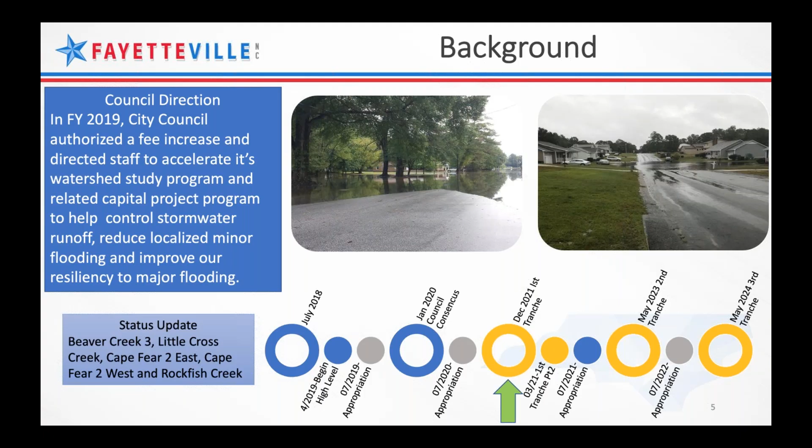First of all, like I said, it takes a lot of hands and minds, great minds, working on this kind of program. We've got tons of consultants involved, and everybody's just been phenomenal. It's been a great experience. Like I said, Freese and Nichols serves as our external program manager overall, and then we have different firms managing certain watersheds and modeling watersheds, and also surveyors.

But it doesn't stop there. As y'all might imagine, not only do we have interdepartmental collaboration going on with our stormwater folks, engineering, construction, streets, we also have collaboration across departments citywide with economic community development, parks and rec, emergency management.

And then we also have intergovernmental collaborations: emergency management, USGS, the Corps. I should have added DOT as well, and then PWC, the Public Works Commission, which you'd be surprised how we work with them. I'm just learning that. We do stormwater and public services; they have streets and traffic, water and utilities, and sewer.

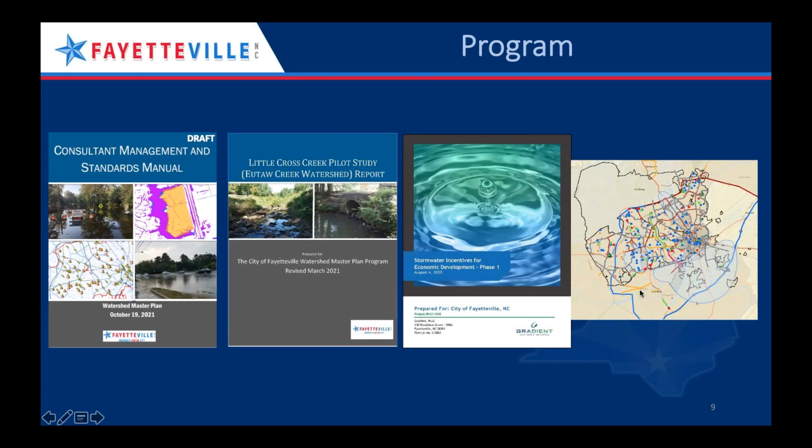So for the study itself, at a glance, the City of Fayetteville, the watersheds that are in the City of Fayetteville, and we have 15 watersheds. Like I said, we just realized there was no way we could take a whole watershed and study the entire thing citywide, so we wanted to spread out our studies.

So the yellow that you see is what surfaced after conducting the ICM, the rain on mesh modeling, and then the watershed prioritization that followed. We took the subbasins and evaluated things like disconnected structures, flooded roads, emergency facilities, and impacted structures, along with a few other criteria. We did a ranking and scoring, and then had a cutoff because we only had so much money. So the yellow subbasins are the ones we identified and presented to council for their approval to begin our studies.

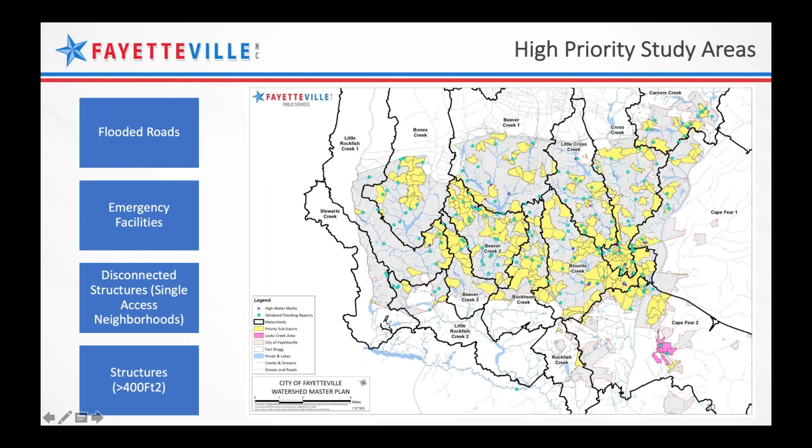So when we presented this to council on Monday, we pulled in these definitions, and I'm not sure I know this group, so I'll just briefly say that everybody kind of understands a watershed. I wouldn't say it quite like this, but we're using computer software to simulate rainfall runoff for the various storm events to predict how much flooding we've got and to predict how well our system performs during these design storms.

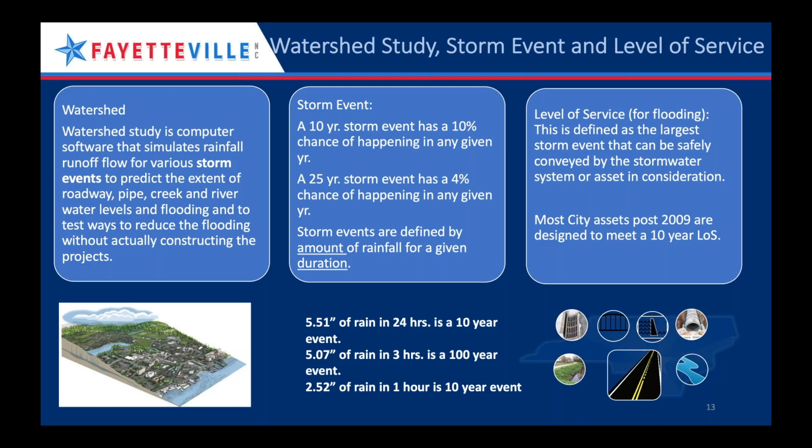And we're looking at a variety of storm events. I think we're at 2, 5, 10, 25, 50, and 100 year storms are the ones we're actually modeling. And the level of service, most of our city assets that we have designed and built after 2009, they're designed to meet the 10-year level of service.

So this could actually serve as kind of a timeline as well, it's our process. We define that minimum level of service, so what were we looking at, what do we want to design for, but what do we want to study also and understand better. Then we prioritize those areas that don't meet that level of service through scoring and ranking, and develop potential solutions for the prioritized areas we want to move forward with. So these are the different levels of winnowing down to where we really want to put our money.

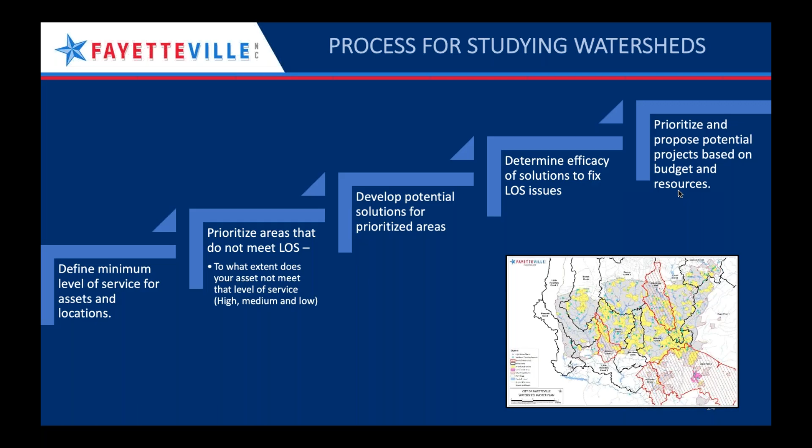And once we had developed potential solutions, we needed to know, well, how well do they fix the problem? And then we had a huge pot of proposed solutions, even from just these first 3 or 4 watersheds, and we needed to winnow that down and prioritize to move forward to council.

So level of service, what you see in plain green are what we designed for, and what you see hatched are what we're studying for. So when we say, for example, inlets at sag locations, 25-year level, we actually use that criteria in our scoring of areas of concern, for example. I won't go into detail there.

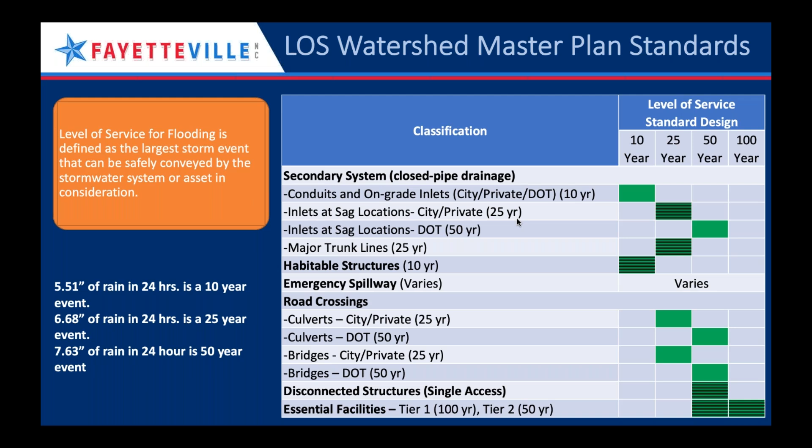So Little Cross Creek watershed, on the left is the entire watershed, but we don't actually study what's on Fort Bragg, so I just wanted to make that clear. We have very little information about Fort Bragg, it's kind of like a big blank hole to us.

And I'm sure the watershed doesn't see it that way, but that's how we have to work with it. On the right is a focus of the area we are looking at, and you see we've got concern areas ranked high, medium, and low. We didn't just pick the high areas to move forward with.

Once we rank them, we ground truth concern areas. We pulled in our people who've been on the ground—we call them boots on the ground—people who just know the city inside and out, and they verified and helped us prioritize these concern areas.

And the little red dots you see are where we had suggested the consultant move forward to identify or develop proposed solutions—those are represented by the little red dots.

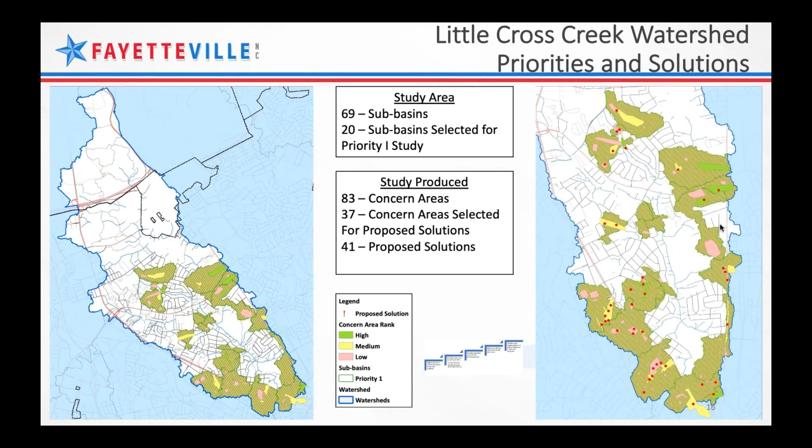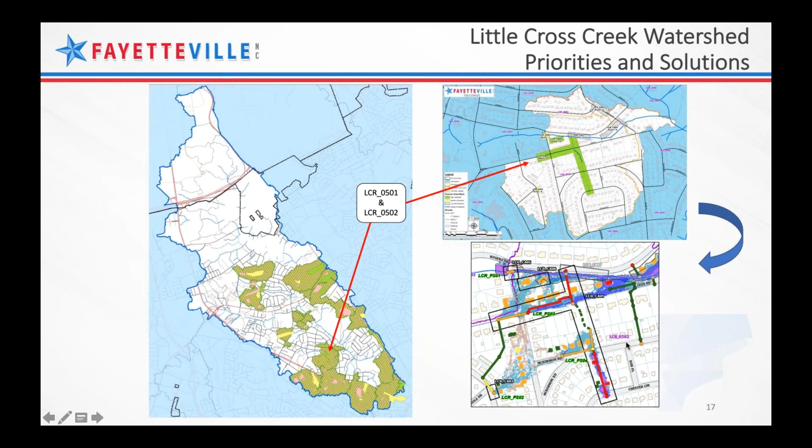And I mentioned the pilot study. So the arrow, LCR 0501 and 02, were the subbasins evaluated as part of the pilot study. We used the pilot study to really test out our concepts, our methodologies, our modeling decisions, and also develop our communication tools like this inundation map you see here.

So a little bit better glance at what our sample model output looks like. This is an inundation map under existing conditions, and inundation under future conditions with the consultant's proposed solution. You can see in the legend what's the highest level of service met currently, and then what we show under future conditions, which is what we're planning for to accommodate climate change and other factors.

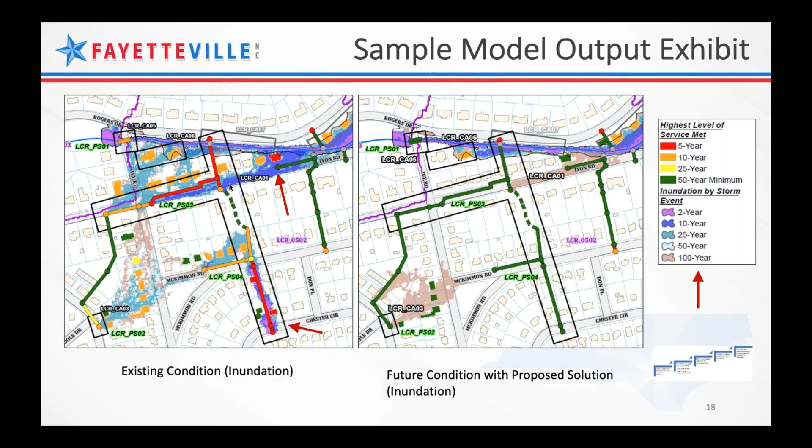How well the new proposed solution performs—you can see I've got a lot of arrows here, and you can see the inundation, lots of inundation, and then all the inundation goes away.

A companion exhibit that goes along with those visuals is the data. So we've created a data sheet, and at the top you see our criteria. We're looking at impacted lane length, feet of impacted lane length under the 10-year, 25, 50-year storms. We're looking at impacted structures, and we say greater than 400 square feet.

There aren't that many tiny houses in Fayetteville yet, so I think we're safe doing that. And then a number of impacted essential facilities like schools, daycares, fire stations, that kind of thing.

Number of disconnected structures—that's really where we've got single access, where there's just one road in and the same road out. And if that gets flooded, or if there's one in and one out but they both get flooded, or however many there are and they all get flooded, we've got disconnected structures.

And then we've got traverse road crossing risk. We actually use a rating of depth times velocity. But those are very important, and they rank pretty high.

So we do the accounting. There's some scoring and ranking, and then when we have our proposed solution, we come back and say, yeah, well we had 2,700 feet of impacted lane length for this city SAG location. Our proposed solution is resulting in 0. So that's 100%—with everything 0, it's 100% efficacy.

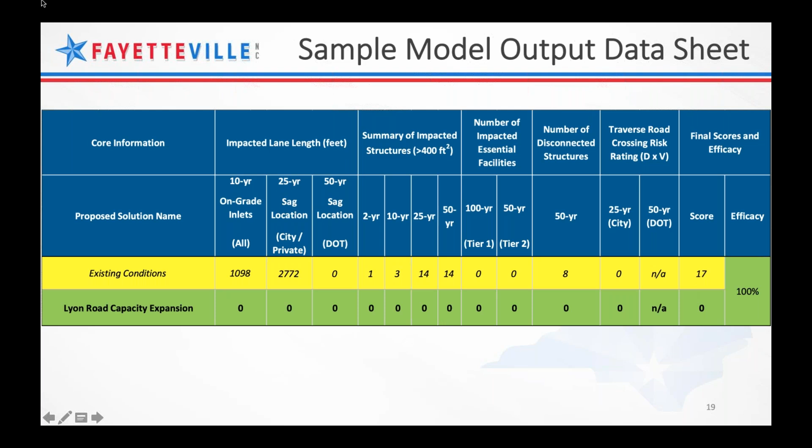So what does it look like? Let's take each watershed at a glance as a whole. So Little Cross Creek—again, we're not 100% on these, and I realize a few of these numbers are a little bit different than what we presented to council, but the gist, they're very close.

If you look at a glance, you can see the winnowing down. We had the subbasins, and out of 69 we picked 20 prioritized. But then within those 20, as we modeled them, we identified 83 concern areas where there were a lot of problems. From there, after the ranking and scoring, we picked about half of them. And then in those half, we said, okay, move forward with developing proposed solutions.

And you can see we got out of this watershed 41—and a pretty big price tag if we decided, for some reason, we had some big windfall, even bigger than our current windfall: $58 million. So a lot of improvement, a lot of money.

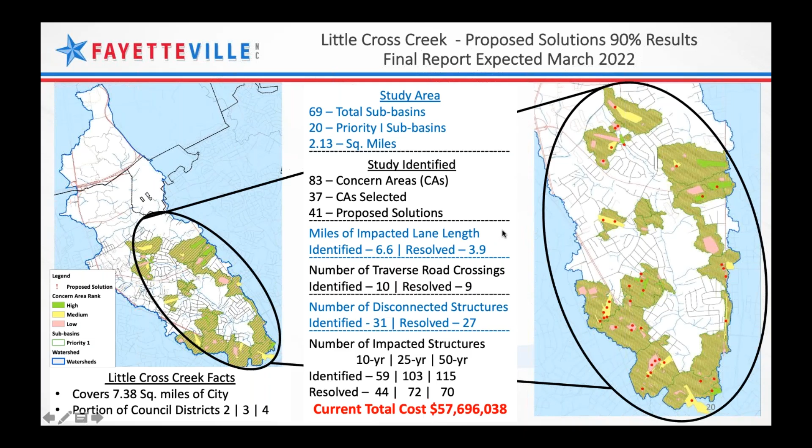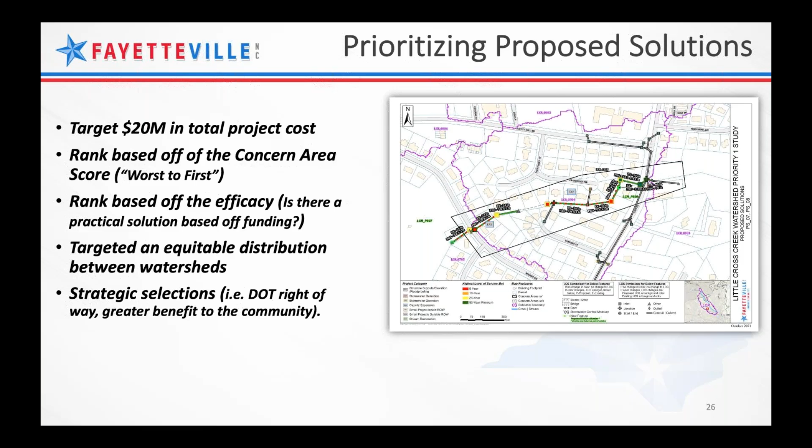And then we made some strategic decisions, even though we're looking just to have on the shelf anything - that includes DOT right-of-way kind of projects, other things, maybe smaller projects that we can feed into our drainage assistance program. Those types of things we kind of peeled away, and then we were left with the pot to pick from, basically, and propose to council.

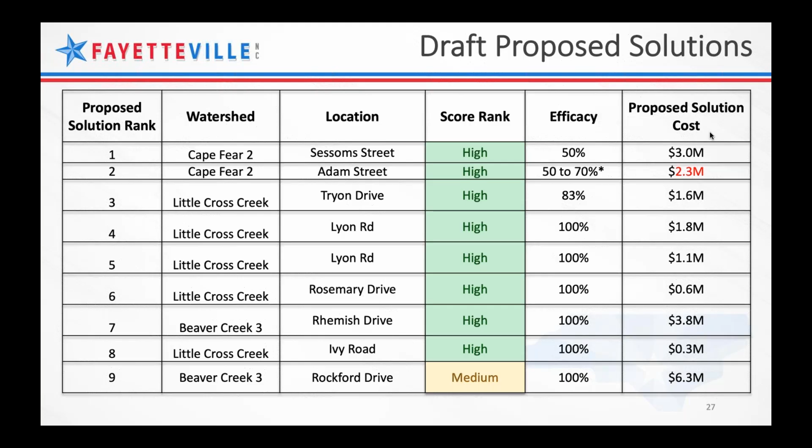For example, one of the numbers I'm going to change will be a slide - I think it was 2.2 for that second Cape Fear 2 project, but this slide shows 2.3, so it's not going to be big changes. But you see here in summary, we had 2 for Cape Fear 2 West, 5 for Little Cross Creek, and 2 for Beaver Creek 3, and again we didn't have any for Rockfish. This score rank is the score for the concern area, and efficacy was the efficacy of the project itself, the proposed solution. We're trying not to call them projects until we actually get funding to do them, which as of Monday was approved, so that was pretty cool. Anyway, the total is about $20.7 million.

That's an estimate, of course, at this high level. So in a nutshell, for example, Tryon Drive, we use the exhibits to explain to council: we've got these projects, we've got this concern area. We picked this project, it had high efficacy. It was $1.6 million, going to reduce impacted lane length about 685 feet for the 25-year level of service.

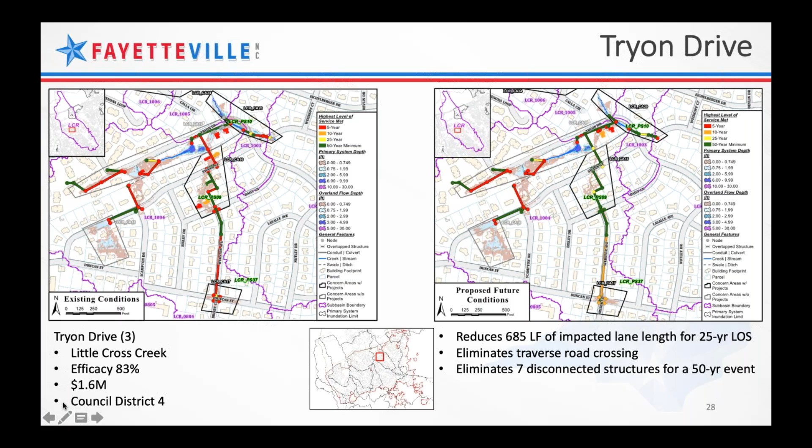And it eliminates a traverse road crossing, and also eliminates 7 disconnected structures for the 50-year event. Another thing I haven't mentioned - I haven't been in municipal government very long, but it's really important to support our different council districts, so we note what council district this falls under, because they represent the public, and this money is all paid by the citizens, so it's a rational thing to do.

So the Lyon Road and Ivy Road culvert, these are shown together. They're actually 2 separate projects, proposed solutions, but we presented them together because they show up on the same exhibit. So this is the Ivy Road, and this is the Lyon Road here. Together, the Lyon Road is reducing 2,700 feet of lane length, eliminating 7 to 8 disconnected structures.

We don't actually focus on mitigating the impacts to structures like homes, but we do score it - if everything else is the same, we would pick to solve the problem where we've got impacted lane length. But we do have what we call a co-benefit - we've really solved a lot of these issues for these structures too with this project. So as a co-benefit, we claim that as well.

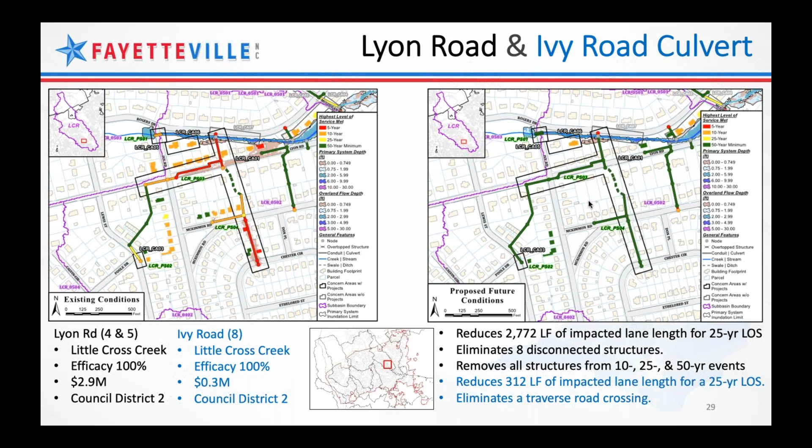What else? These have a high efficacy. Essentially, you can see we're predicting that we're going to mitigate, at least for the criteria we're using, the flooding problems in these areas. And so Sessoms Street, that had a lower efficacy.

There are a variety of reasons why we selected this one. We felt like - and it has to do with our scoring too - even though it had a low efficacy, 50%, we're removing a lot of it, we're mitigating a lot of this flooding on the roadway. So we're going to revisit how we do our scoring, because this is a very important project. We want to do this one. It's been something we've known about for years, so we were not going to discount it just based on that lower efficacy.

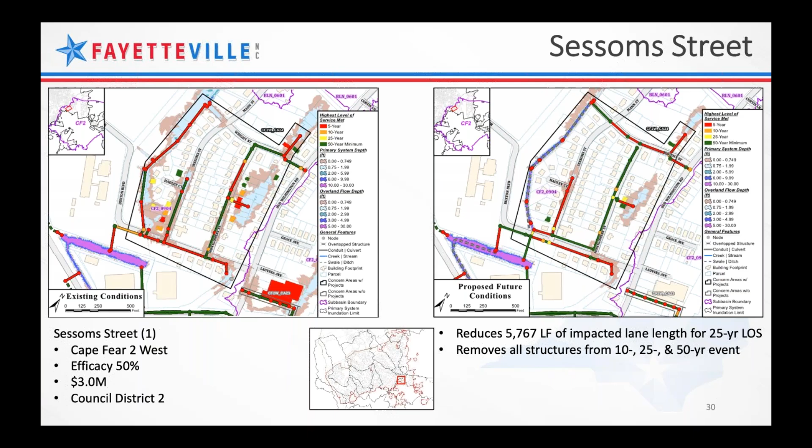And that's why having this real integrated involvement with the city staff across the different divisions and departments, having that integration within the city and between the city and the consultant, is so very important. It's been invaluable.

Adam Street, that actually has about 50 to 70% efficacy. So I'll change this on this slide. But when we first saw the efficacy, we were looking at how well this project will perform if we also build - together, so if we build this one, I think it's this one.

Well, I'm not sure if it's - if we build this project and then this one as well, this would have had 100%. But we actually started looking closely at what this downstream project would be, and it's behind I think a grocery store, and the flooding problem is really their parking lot, so we just separated those out and selected this project to move forward with, to provide the greater benefit to the public.

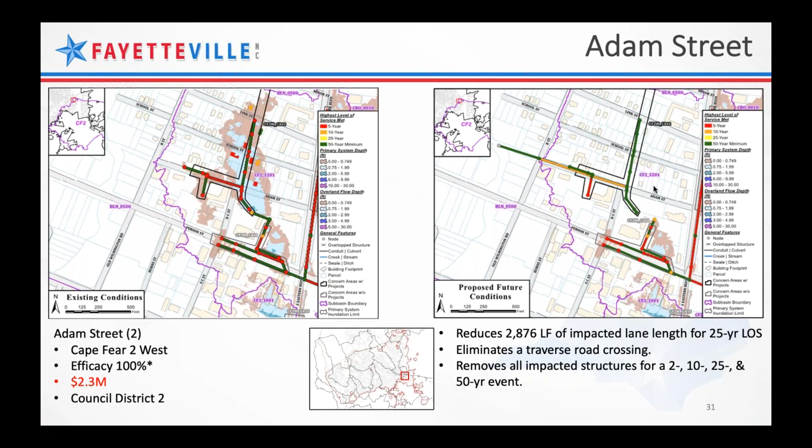So I won't go over them all, but there's another one, Rosemary Drive, Rhemish Drive, and that's in Beaver Creek 3.

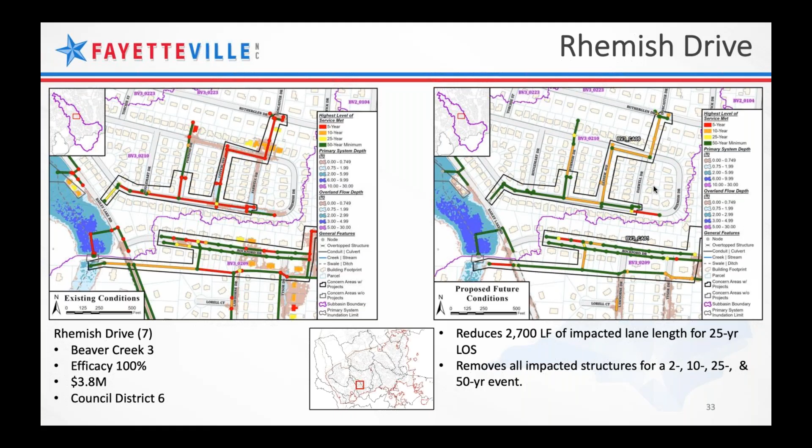If anybody's got any feedback, did you have any problems reading these? We feel like these exhibits are just at a glance very, very easy to take a look at and see what's happening.

This is actually a depth slide. We've got exhibits for inundation, but we also have exhibits for depth, and that's important where you've got, for example, this traverse road crossing risk - that might be why we've included that here, because we use depth to determine what that risk rating is.

And you can see here, the brown basically goes up to 9 inches. All of that goes away.

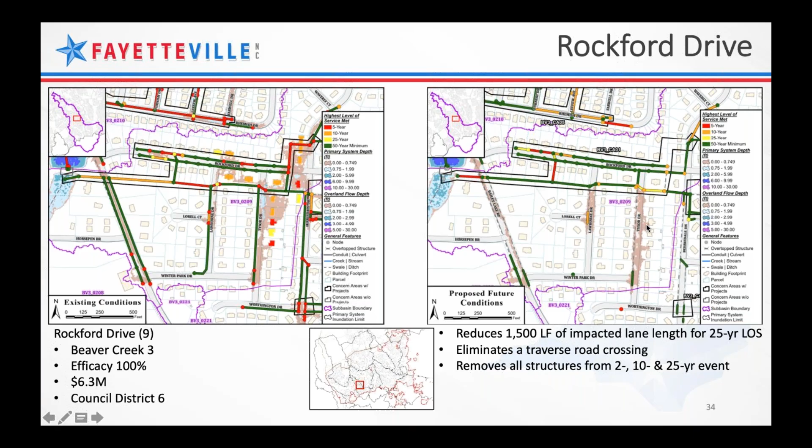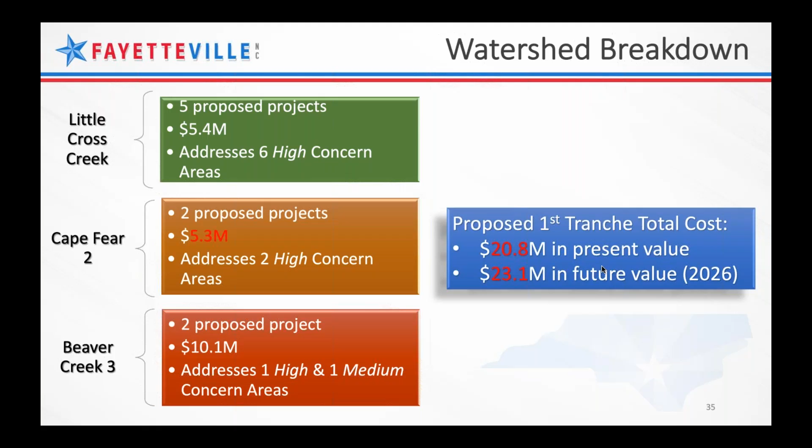So in a nutshell, basically we've got about $21 million in our first tranche of projects, and we're using a 2.1% cost escalation factor in general for the whole project. So we're taking a look at that, and for council's purposes saying, well, if we build it now, 21, if we wait, it's going to cost more in the future.

And then we did a summary - if we do this, what does this really give us? There are a lot of other co-benefits, if you will, that we haven't considered. There's certain things that we're looking at right now that I kind of breezed past.

We've got a closed circuit TV program, and for these proposed solutions, we focused on our existing infrastructure. One of them, the infrastructure is failing, and that fed into our decision making as well. We'll continue doing that, focusing on our proposed areas.

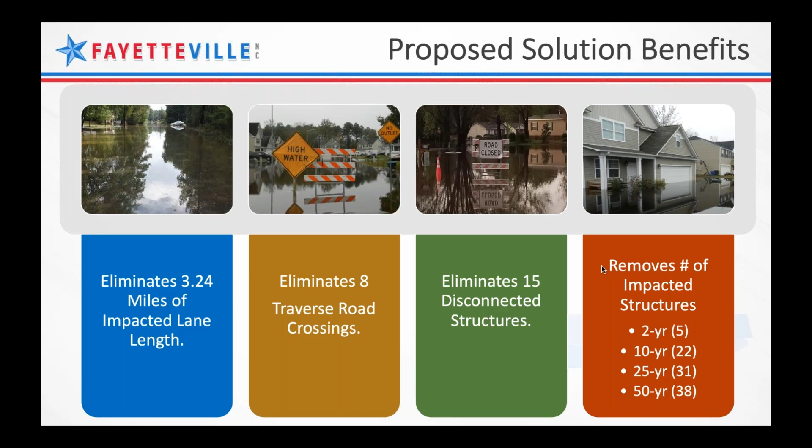As we get deeper into our CCTV program, we're anticipating possibly needing to juggle our prioritized list of projects to accommodate some pipe somewhere else, or something that's going to fail, imminent failure we don't know about yet. So there are those kinds of considerations, and we know we're fitting into the CIP. We're hoping to continue, and as we get new information from the other watersheds, we'll continue to feed and reconsider our prioritizations.

For those of you who weren't able to attend the council meeting, we didn't start till 8. It went really long, but we asked for two things: additional funding for watershed studies, and I'll tell you why, and then consensus on the projects that we presented.

One of the first slides showed all the yellow, and I said these were our prioritized subbasins. But as we started modeling and developing the program and learning what it takes, we had about 13 million, and we decided now what's in the hatched is what we actually could afford to do in the future.

So if you take a close look at, for example, Bones, that's a good one. A lot of it's up here in Fort Bragg, but in the city boundary we had a lot of yellow. With our cutoff, with our existing budget fund balance, we were only able to do a couple. So what we came back to council with was, we just don't think we're doing these other watersheds at the same level, the same care and evaluation as we were for the first 3 or 4, with this limited budget. So we came back and asked for another 2.5 million to be able to do the yellow, not the hatched.

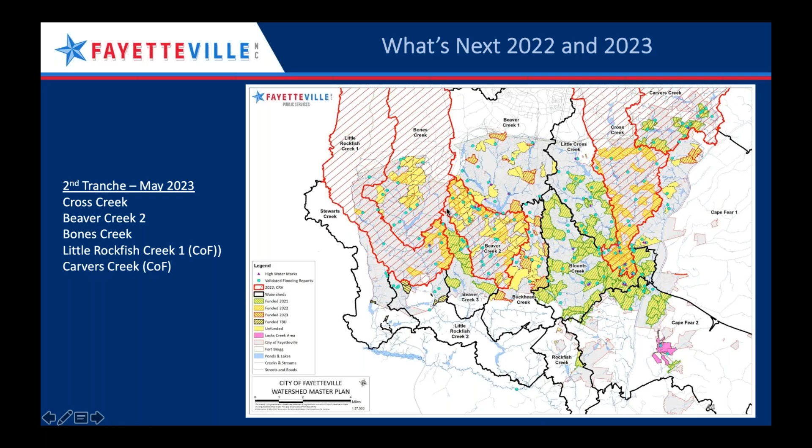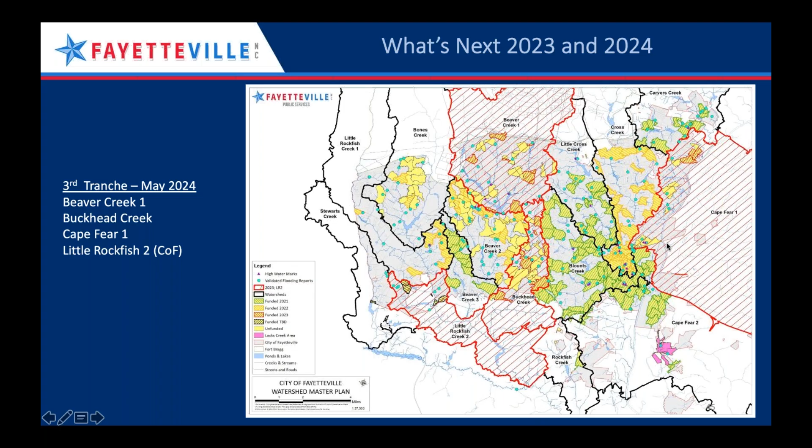And then in 2024, the remaining ones. We made a decision: there's not much out there for Stewart's, and I think the other one is Buckhead. No, looks like we are going to do Buckhead, but I don't think we're going to do Stewart. So that's what we asked council for, and they approved us moving forward.

So now we're in a position of having a lot more work. So anyway, that's all I've got. Katie, does anybody have any questions for me?

We've got a couple. The first one: are your rain event estimates averaged across the watersheds, or do you account for localized heavier downfalls?

I'm not sure, Katie, but I can get that answer to you. Because I know that's really important in Fayetteville, and I'm not sure how we decided to handle that, but I can get that answer.

Are you funding your future stormwater projects with bonds only, or including some funding with stormwater fees collected? The latter, so we're doing a combination. We're going to use our fees collected. We have some fund balance already, I think $1 million that's available. $1.5 million we've asked for in addition, and then we're going to ask for a bond of $20 million.

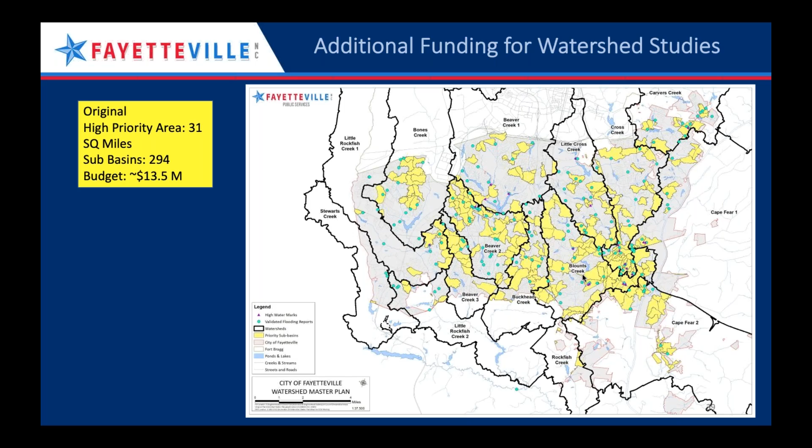And that's all of the questions that we've got right now. Alicia, thank you so much for your presentation and your time today. Do you have any last words or thoughts?

No, I'm really excited that you invited us, Katie, and we're really excited about our program. The more we get to share it, at some point probably every consultant on this call is going to be working on it. As you can see, there's a lot of work coming up, and we have a lot of initiatives too. We're going to be studying some of the dams. We just received proposals for looking at some of the dams across the city as a potential for dry storage, and we just received a lot of proposals for design and construction. So we were trying to get ready for this big influx of projects.